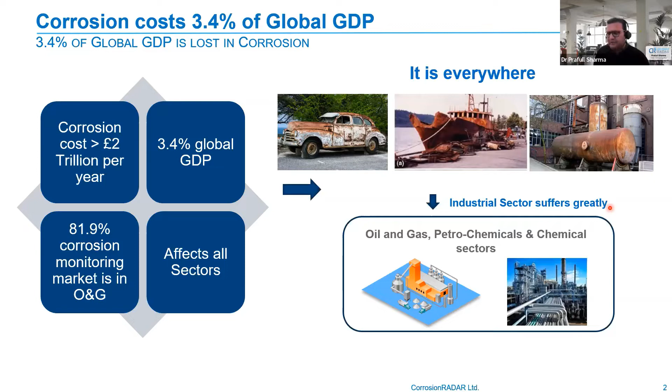It is everywhere. If you look around, the reason why we have to retire our cars after a few years is heavy corrosion. And that's the reason ships get retired, pipelines get retired, industrial accidents happen, shutdowns happen. So it's a huge issue, which goes unnoticed in common eyes, but it's among the top issues. The industrial sector suffers greatly as well, including petrochemicals, chemical sectors, oil and gas production, or even fertilizers. So today's discussion will be on the industrial sector and how CorrosionRADAR was born to address some of the specific issues here.

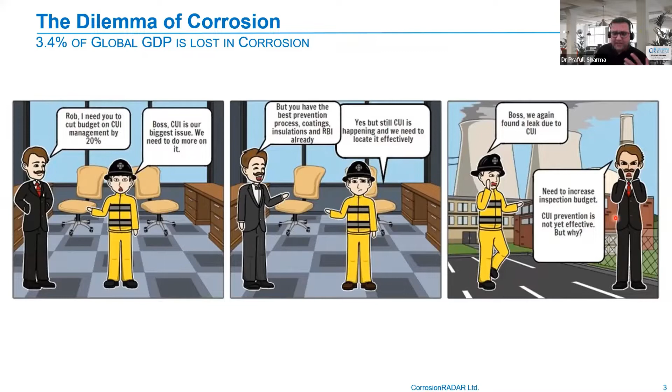This cartoon pretty much shows the day-to-day conversation which happens in the industrial world. There's a manager, a supervisor and a technician talking about an issue called CUI, which is corrosion; I will talk about it in more detail. Rob is the maintenance manager, with a budget to maintain their industrial plants. The technician says, I have a big issue which needs to be solved, please don't cut my budget. But the manager says you have the best prevention processes like coatings, which avoid corrosion, and the best practices in the industry called RBI, which I will also talk about. Yes, but still corrosion is happening. How can we locate it effectively? Then one fine day he finds a leak, and the supervisor realizes, hey, we need to increase the budget. How can we prevent it? These are daily conversations happening in the industry.

So let's narrow down a bit to specific issues of corrosion, because corrosion is a very, very wide topic. There are over 70 or 80 damage mechanisms of corrosion which have been identified.

So what happens in the pipelines, for example? Now, these are the pipelines in chemical industries, which are carrying toxic chemicals, production, and they are insulated, for example. And insulation means you can't see the pipe. These insulations are seen everywhere, even in our refrigeration units. Insulations protect thermally, and every few years they have to be opened because they tend to develop rust.

Now you see here, these pictures are coming from, say, a publication from Malaysia, which says a petrochemical plant has severe rust. If one of them leaks, nobody will notice, and there will be accidents. And invariably in this industry, a lot of accidents happen.

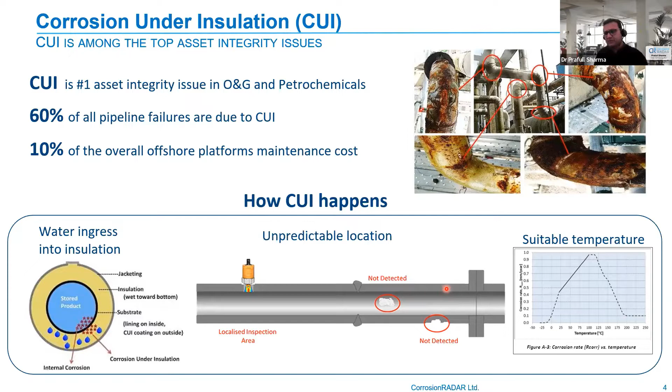So this is corrosion. This is a specific case of CUI, why it is big, it's everywhere, and how a company is solving it. CorrosionRADAR is a spin out of Cranfield University in the UK, and it is on the mission to bring a predictive element to corrosion. So how can we predict corrosion, when and where it will happen? It's a massive new global opportunity. And this can be enabled by industrial IoT.

Now, IET members must be knowing IoT and industrial IoT, where you put sensors and connect them wirelessly and start to monitor, and also with that data start to predict. So we are about that. CorrosionRADAR is about that, use of IoT for predictive analytics.

But this is labor intensive and can lead to unscheduled shutdowns. There's a big safety risk. These are hazardous industries. Toxic chemicals, flammable chemicals can lead to accidents.

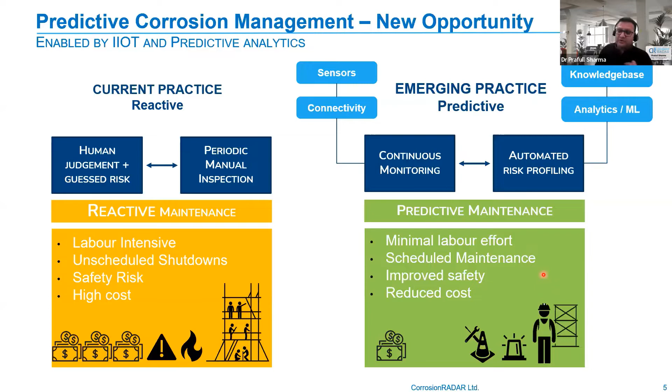Again, some of you may feel I'm going into too much detail, but it is important to understand why we are talking about this, right? And then I'll talk about the entrepreneurial side in the second half.

So the idea was born out of the technology of reflectometry, I would say. CorrosionRADAR branded it as electromagnetic guided radar, EMGR. Now that's a core sensing principle which was patented back in 2014, 2015, when I was at Cranfield University during my PhD days. So this technology basically used the reflectometric principle, the same principle which is used in cable fault detection.

So if you place the cable along the pipe and let the cable be exposed, say to water, if water touches the cable, the electromagnetic waves are interacting with water, then it will lead to an impedance change of the cable, and then we'll see a reflection. And then we can convert that to understanding the pipe condition, say risk of the pipe or hotspots of the risk of the pipe.

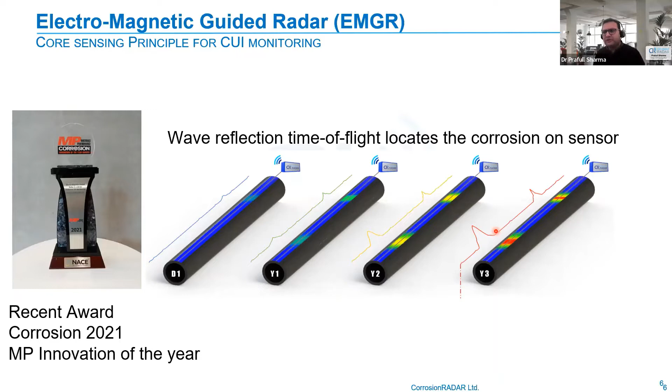Now, if there's an issue flagged and the risk identified, then people can go and inspect at that location. This same sensor can be placed in zigzag fashion or in critical areas. So it's really an embedded sensor inside the insulation.

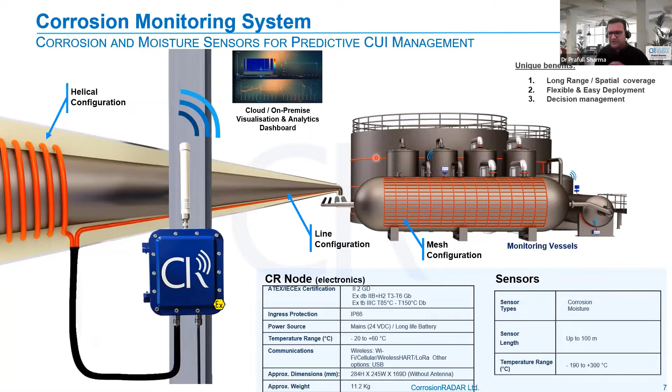So if we can narrow down and make a fraction, then unnecessary inspections can be avoided, and hence less trips to the rigs, less trips by helicopters to the offshore rigs, etc. So it's a huge cost savings and carbon savings.

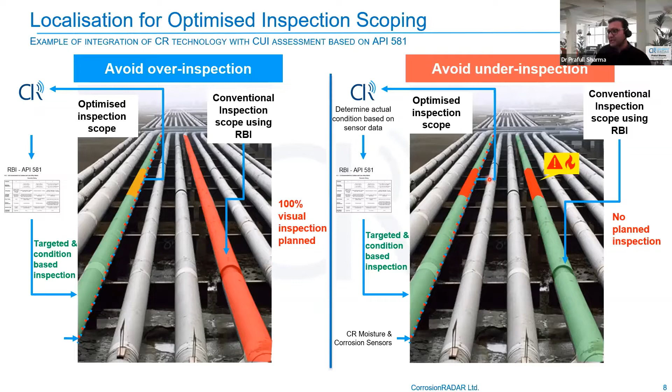So the sensors, if they're placed, say the scenario is on the right-hand pipe, if the sensors are placed, then it can pretty much say, okay, that location is risky. So you need to change your decision to actually inspect this pipe at that location. So this will avoid the under inspection side.

Now, as far as this journey is concerned, it went through a long process, many years. So this is one of the case studies of how it was tested by a third party. We got good partners in the UK. UK have a good ecosystem. So Net Zero Technology Center in Aberdeen have a mandate. It's a government and industry consortium to promote new technologies. So they funded these trials where independent rigs were set up.

So you can see a pipeline and the sensors were wrapped around, and a particular location here was insulated, and the corrosive conditions were set up. So you can see this pipe and the sensor on the top, and this pipe was subjected to heavy corrosive conditions, say as simple as salt water. You can see corrosion developed over time, and then the sensor was also corroded.

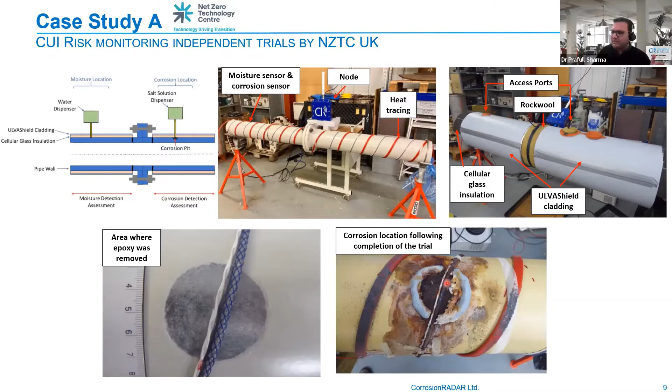So finally, this case study is clearly telling what the outcome of the technology is. Once the system is deployed in hardware and software, it is transmitting data to a cloud platform. Then remote monitoring enables monitoring water, where and when water is coming in through a heat map. Here the x-axis is the time and date, and the y-axis is the distance along the sensor. So it's actually locating where it is happening.

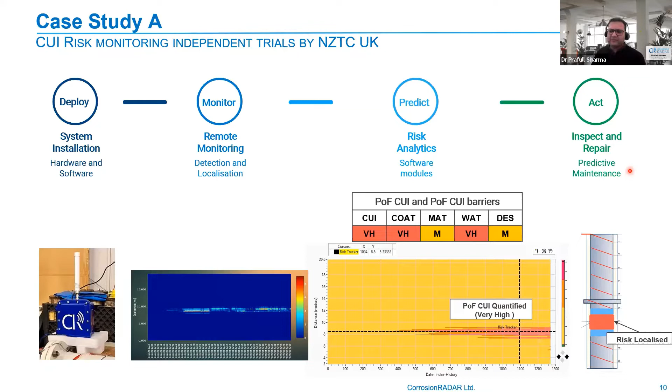So finally, this is combined with the risk analytics modules. Now this is where corrosion science comes in, where corrosion risk and corrosion rates are estimated from analytics. And then coating risk color coding is done based on the industry guidelines. And finally, it is located where the risks are high, and inspection and repair can happen. So this process is now being applied in the industry.

So you see here another case study on a real plant, which happened probably a few years back, in the Netherlands, one of the production columns in a petrochemical industry. Leaks can be hazardous. It's producing hydrogen cyanide, which you can imagine is extremely toxic. And this production column is 25 meters high.

And they have to create scaffolding, spending probably some fraction of £1 million every year to create scaffolding to access the insulations and open the insulations and inspect it. So they said, we don't want to create an over inspection scenario, because most of the time we don't see corrosion. So how can we make it more predictive? That's where the sensors were deployed on the top and the bottom.

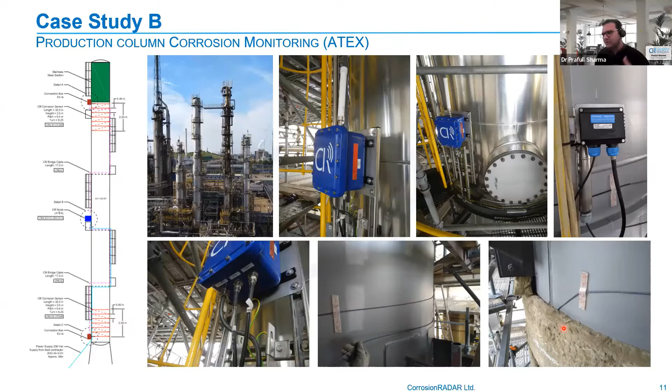And now from then on, we know the conditions inside and start to analyze it and predict the onset of corrosion. So this can lead to huge cost savings, because now end users can take proactive measures, or scaffolding can be done only when needed. Rather than every 5 years here, it can be done in 10 years, so leading to huge cost savings.

So in summary, before I talk about the entrepreneurial side, this is an era of predictive corrosion monitoring. So monitoring can lead to data-driven risk understanding of the assets. In this case, we are talking about oil and gas energy assets. So early risk detection can lead to optimization of maintenance and reducing the unplanned shutdowns, which continue to happen. Accidents continue to happen.

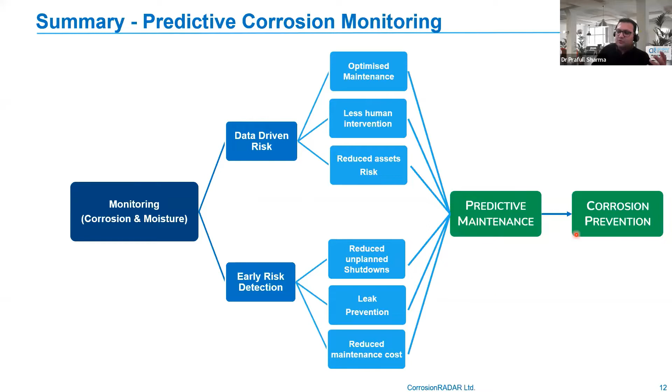But with these technologies, we can do predictive maintenance. Prediction is better than reaction. And then it can lead to corrosion prevention. And hence, this is our contribution to this community.

So that brings me to the second part of the talk, which is the entrepreneurial learnings, because this is an idea which came out of academia and is now making global impact. CorrosionRADAR was also venture funded by many investors, including the biggest company in the world, Saudi Aramco. And they are equity shareholders in the company, because corrosion is such a big issue. And hence, the Middle East is also a priority sector for the company.

So it's making a global impact, but it had its own entrepreneurial side of things, and it's a roller coaster ride. And I would like to share a few learnings as a researcher in this community of technical minds as to what the key learnings are. So the journey started in 2014, with the problem and the idea. So imagine the mind of a PhD researcher. That's what I was personally. Mid-career, after a stint in industry, I joined Cranfield University for a PhD.

So the problem is to find a problem statement in PhD research. So what was given to me was, hey, we need to find corrosion. Can we have some technology for that in the PhD research? So the idea was, hey, let's make a corrosion monitoring sensor. And this is for a specific case of corrosion under insulation on the outside surface of a pipe, which is hidden under the insulation.

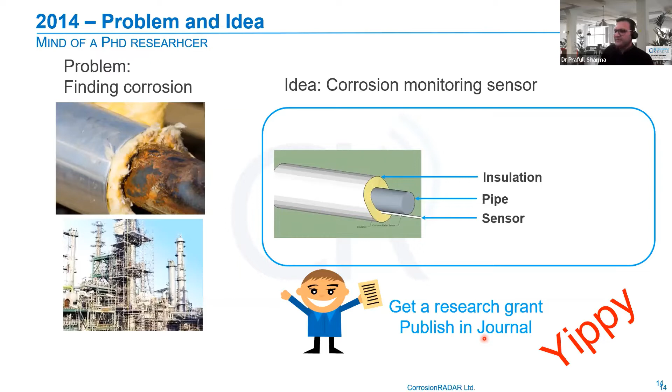So yeah, the idea came that, okay, let's put a sensor and use reflectometric principles, get a research grant, publish in a journal, get a PhD. Yep. So that was the thought process at that time. But something happened, something changed in between. Cranfield used to organize startup weekends. In the university, they used to promote entrepreneurship among the students.

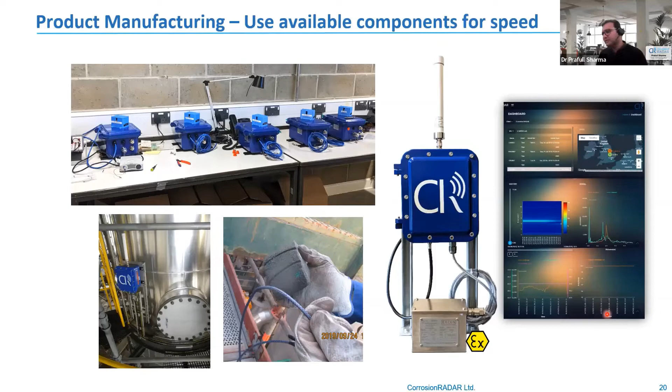Even the web portals and dashboards were available. There are plug-and-play dashboards available. The IoT ecosystem is so improved and so matured now that we can use off-the-shelf, rebrand it, and go to the market. More importantly, it's important to go to the market without investing too much into the product. First, we have to make sure that there is a market for the idea using off-the-shelf components. And once you prove that there's a market, then you have to invest in the product itself with the right resources.

Another learning is media. Leveraging media to reach customers is so powerful. We were identified as a top 5 predictive maintenance company at some point. However, I still doubt that at that point. But because of that, we got a lot of exposure. A lot of customers came in. We continued to reach key industry media, for example, magazines, to cover us and write articles. Also, the Cambridge ecosystem gave us a few awards, which led to exposure, and we got our venture capital money earlier, which also led to a lot of traction in the industry.

Then we leveraged social media a lot. So you can see here Corrosion Management magazine, which is the Institute of Corrosion magazine. A lot of fan following, and we were covered on the front page of that for inspection and monitoring. And this led to a lot of inquiries. We used a lot of social media. During lockdown, we started something called CUI over Coffee. It's a webinar series of industry bodies. We hosted them, and a lot of people joined to have a conversation around this problem of corrosion.